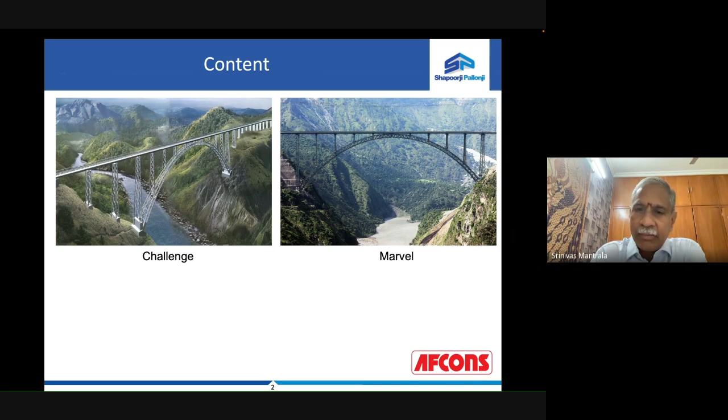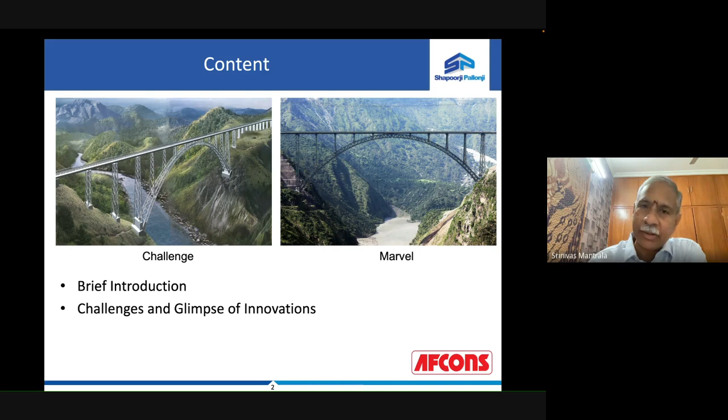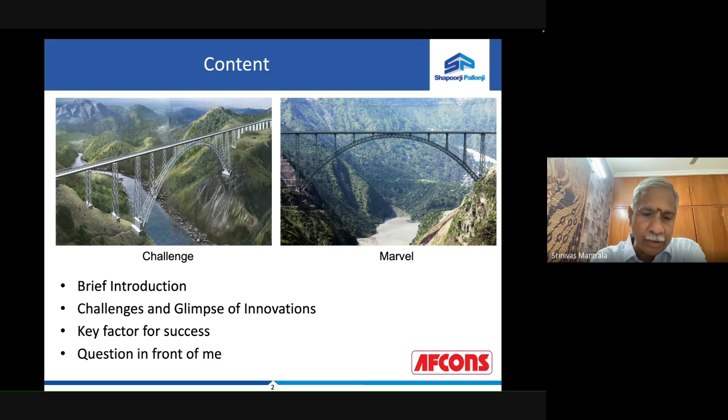It is a marvel. Now I'll be giving you a brief introduction about the bridge, then challenges and a glimpse of innovations in a very short time, because the work done is for more than 15 years and it can't be presented in just 20 or 25 minutes. And then what is the key factor for success that is required for future projects? And then at the end of the day, when I look back, there is a question in front of me, and I would like to answer that question.

Chenab Bridge is the world's highest railway bridge, and it is in the Udhampur, Srinagar, Baramulla rail link project. And it is in the Himalayas. Why Himalayas? They are young, active mountains. So the earthquakes are more and require very special design requirements. Temperatures go to sub-zero, so that requires special materials to be used for the construction of the bridge.

And it is very difficult to access, across a deep gorge with limited access. So our construction methodologies should take care of this limited accessibility. And it is a sensitive border area and also a politically disturbed area. So the whole bridge has to be planned properly. While the bridge is the physical structure, the backbone, the spirit behind the bridge is implementation of new technologies and innovations.

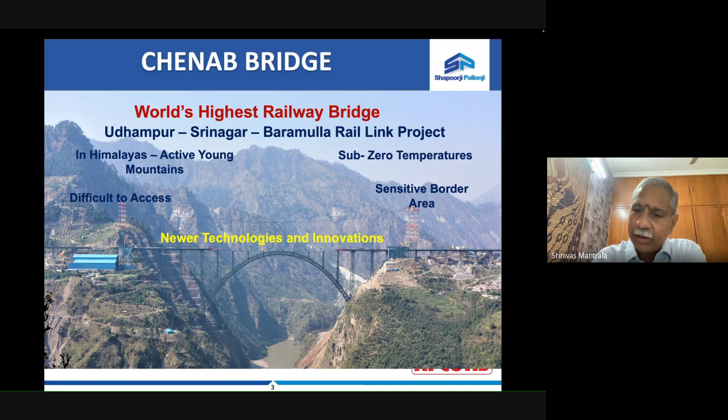Implementation of new technologies and innovations is not an easy thing. It is like you are trying to please your girlfriend with her favorite dish, which you don't know how to make. So what do you do? First, you understand the recipe, get the best materials, and then you conduct a couple of trials, succeed. Then when she comes, you serve it, and win her heart. This is what you have to do, and this is what has been done on Chenab Bridge.

So the brief introduction of the bridge: the client is Northern Railway, contractor is Afcons, an undertaking. Design consultants are from Finland and Germany. Proof consultants are from UK. Slope stabilization, which is the most complex part of the project, is done in India by IISc Bangalore and IIT Delhi. Most important, you can draw any plan, but execution, construction engineering, is the most difficult part. That was done by Afcons in-house.

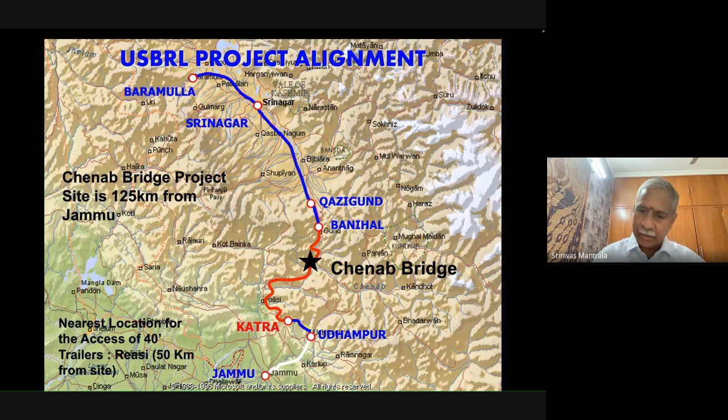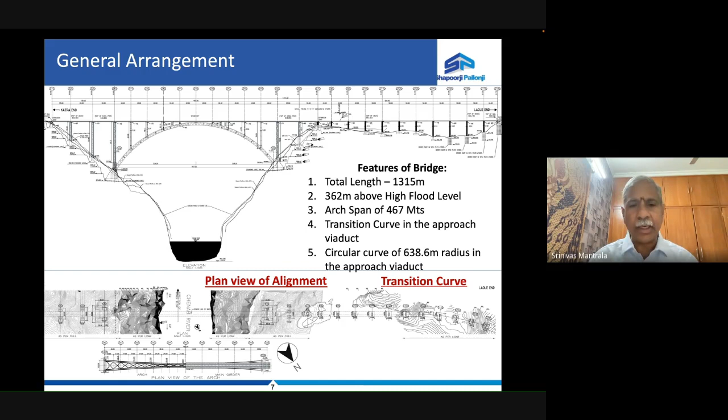Chenab Bridge is 125 kilometers from Jammu, and the nearest location for access of 40 feet trailers is Reasi, which is 50 kilometers away from the site. The general arrangement of the bridge looks like this. This is the plan, this is the elevation. In the plan, you can see there is a transition curve in the approaches. Length of the bridge is 1315 meters, and the height is 362 meters above high flood level.

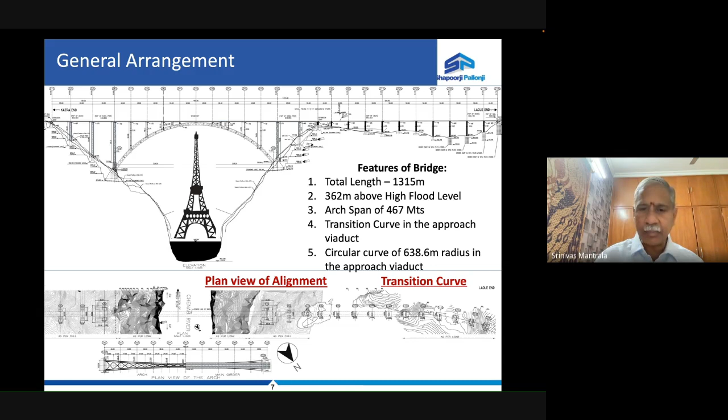So just for you to have a feel of the height, you can put the Eiffel Tower below the bridge and still have a clearance of 20 to 25 meters. Now, highlights of the Chenab Bridge, the world's highest railway bridge. Normally in India, bridges are designed with a life of 50 years or 100 years. We designed for 120 years. The deck is launched incrementally on a combined circular and transition curve for the first time in the world.

And we have installed the world's largest capacity crossbar cable crane for the erection of piers, trestles, and arch segments. We have done extensive wind tunnel testing because this bridge is across a gorge, and this has been done for the first time in India. And we have done fatigue design and detailing of the bridge. That is also for the first time in India, and it's a marvelous work.

And we have used double corrosion protected bar and cable anchors for ground support for the first time in India. And we have used the highest diameter and highest grade high strength friction grip bolts with geomet coating in this project. Normally bridges are never designed for blast loads. Because this bridge is close to the Pakistan border, we designed the bridge for blast loads.

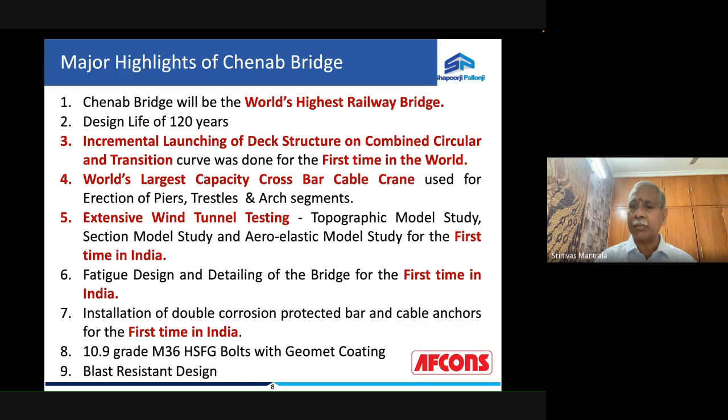And special considerations in the design: because it is in the Himalayas, we have used special structural steel because it is in sub-zero temperatures and a seismically active area. So we got a site-specific response spectrum developed, we carried out dynamic analysis of the structure, and we did the ductile detailing. Because of the poor geological conditions, we have done extensive investigations and extensive slope stability analysis. Because wind speeds are high, we have done wind tunnel tests and then designed the bridge according to that.

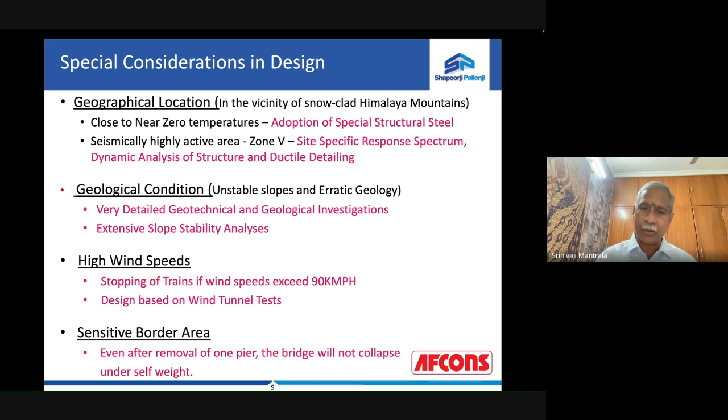Sensitive border area, the bridge is designed for redundancy. What is redundancy? This is the arch. Even if you remove one member, the arch will not collapse. And similarly, even if one diagonal member is removed, the bridge will not collapse. That is how the bridge shape and structural arrangement has been made to make sure that the entire thing works well. And even if these members are removed, still you can carry traffic on the bridge with a limited speed.

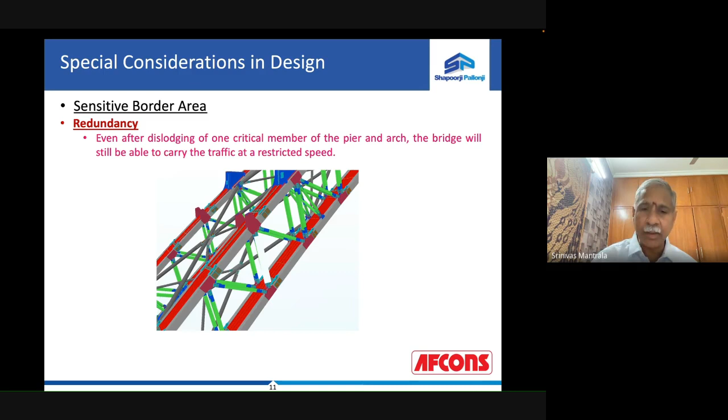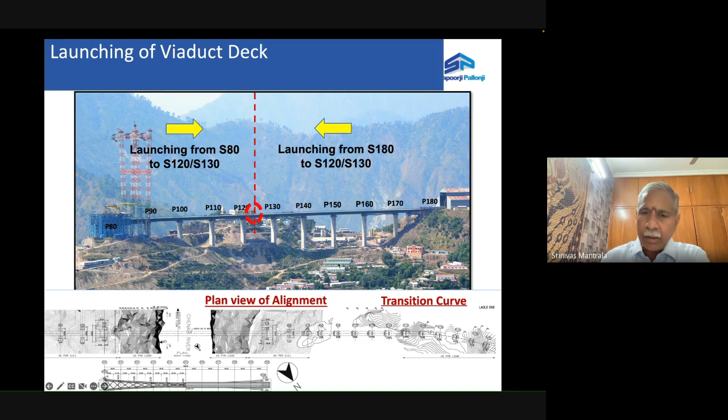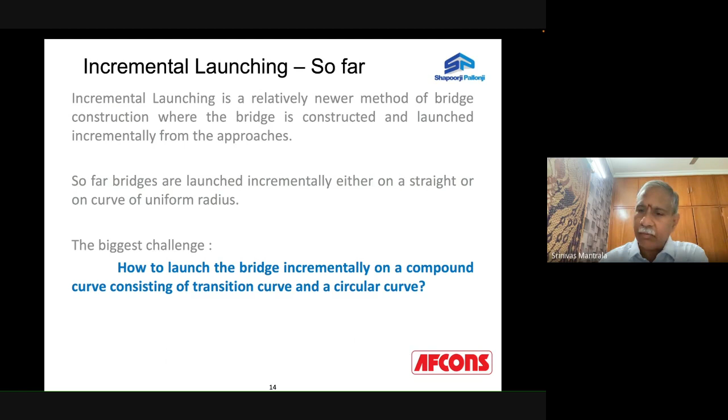Then what is incremental launching? So this is the bridge. I'm talking about this portion, and there is a transition curve here. This is the straight portion, and there is a transition curve. Then there is a circular curve. So world over, incremental launching is done either on a straight portion or on a curve of uniform radius. But in this project, we have used a very innovative technique and did the launching for the first time in the world on a combined circular and transition curve.

The principle is very simple. The deck is fabricated as per the bridge alignment. See, this is the circular curve, blue curve, and magenta. These two colors indicate the original bridge, and it has been fabricated like this only, but it is launched from this point to this point on a hypothetical launching circular curve of different radius. Then the question is how to decide this hypothetical launching curve.

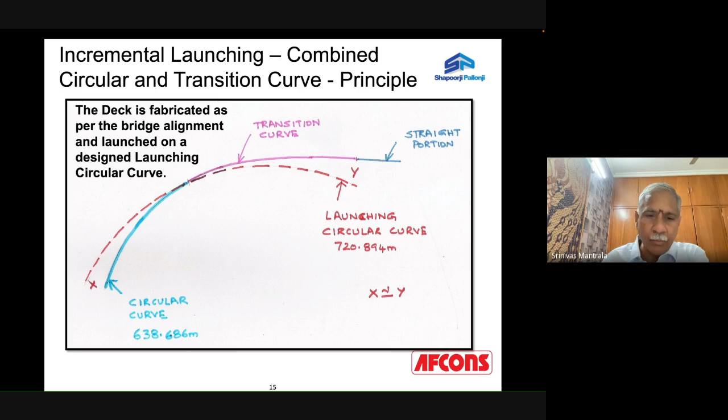So when you are trying to move, the deck tries to move laterally. So this distance x and this distance y should be more or less equal. So we followed this and we have done it. And the proof of the pudding is in its eating. So this is what the bridge looks like, combined circular and transition curve, which was incrementally launched.

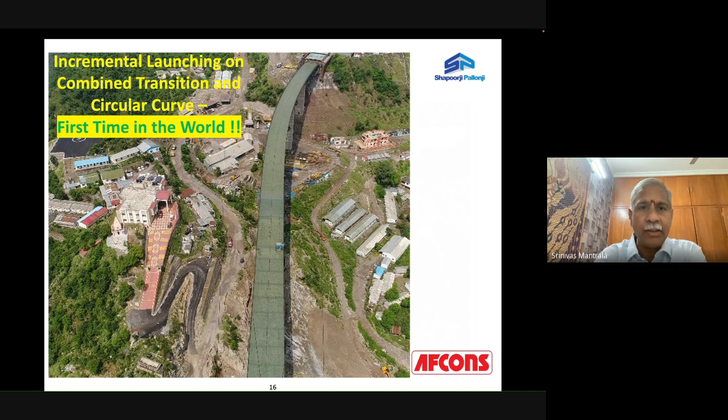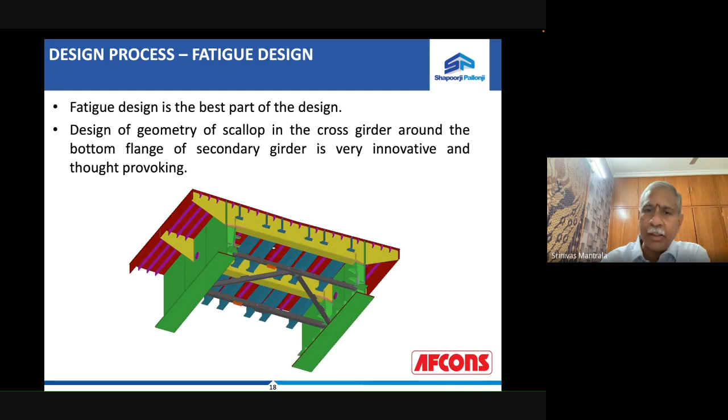Fatigue design, yes, is the best part of the design I like. And the design of the scallop around the secondary beam is very innovative. See, whenever there is an opening in a steel girder at the load carrying member, there will be stress concentration. That concentration will lead to fatigue cracks. There are two options: you go for a thicker plate or you work on the geometry of the opening.

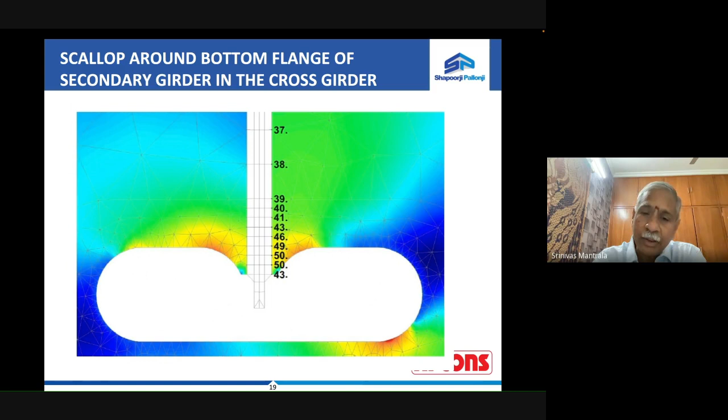By trial and error, we developed this very odd shape of the scallop, and thereby we have optimized the design. And for achieving this type of cutting of the scallops, we have used CNC controlled cutting machines, and this is how this has been done.

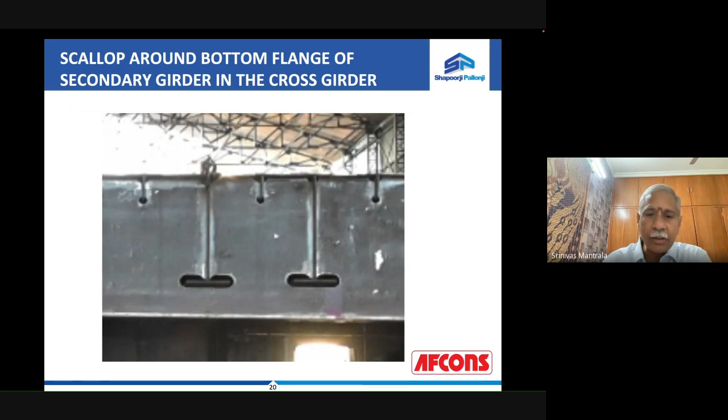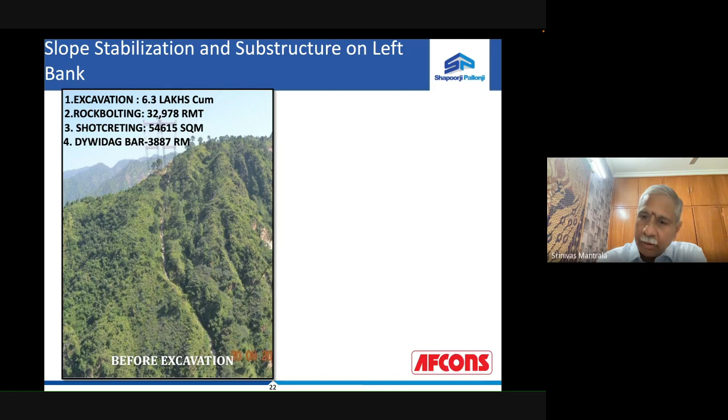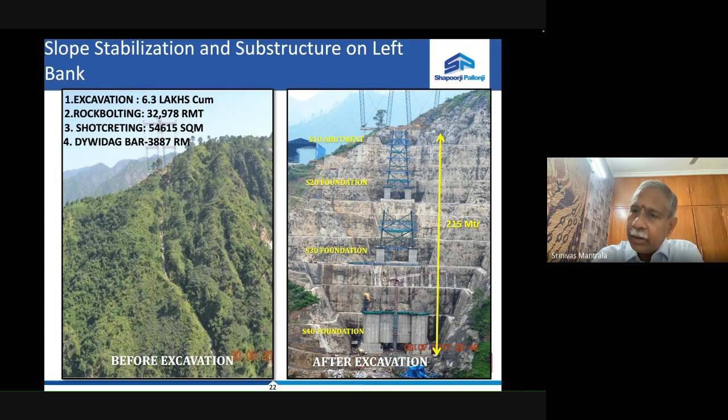So all this work has to be done ensuring safety. And the muck should not fall in the river. It's not that I excavate and dump everything in the river. No, that is not permitted. So the work has been completed very systematically. Design of slopes is one big job, and the execution of work is another job. This is the work we have done from first principles. And in fact, my PhD work is on design of slopes in highly jointed rock mass.

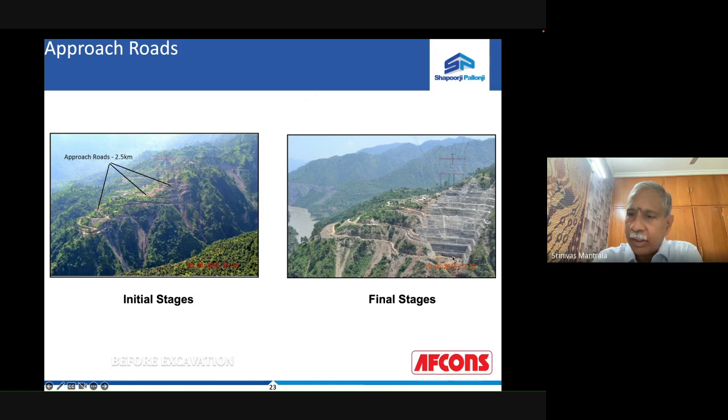So what we did, if you see, in the initial stages we developed the approach roads so that the muck, whatever is excavated, can be transported properly. And this is how it looks when we have completed, with approach roads and stabilized slopes.

Like I told, construction is also very important. We used the top-down method of construction. So we started from the highest point and started excavating as we moved forward. This green portion is the work completed and stabilized. The violet portion is the work in progress. So like this we have done.

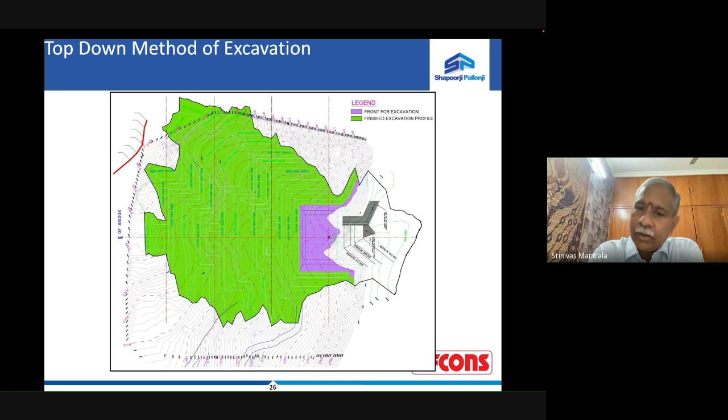And working as per contours, that concept is not just limited to civil engineering. Today, my son works in the area of artificial intelligence, and he talks about logistic regression, contours and contour gradients.

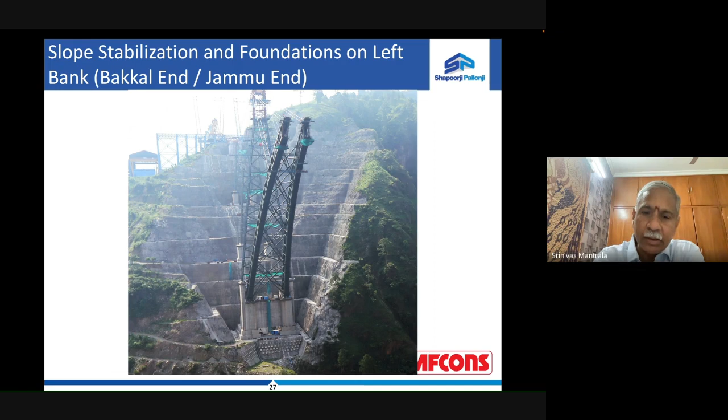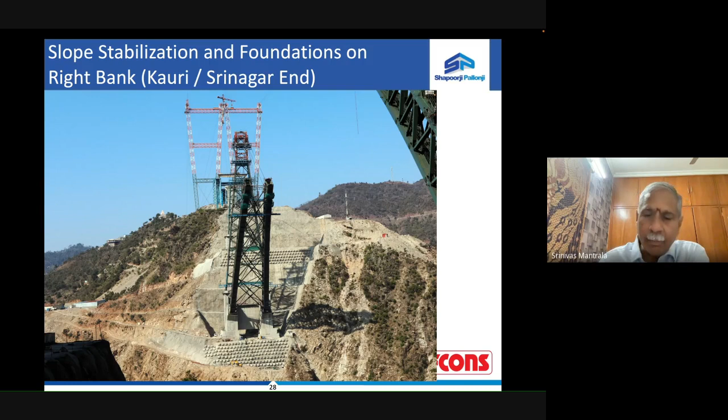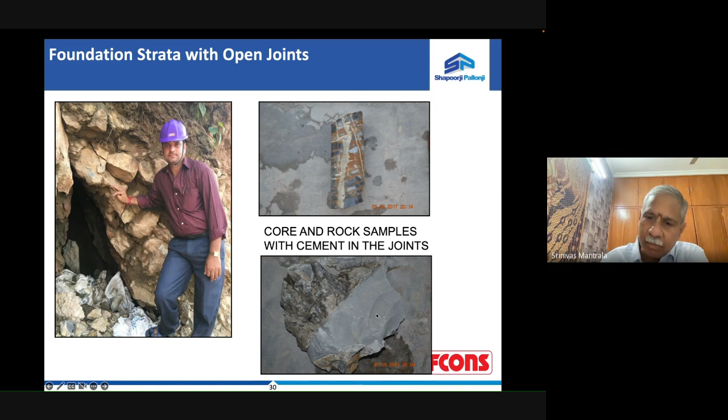So one proof is, you see when you take the core, you see the cement slurry. And if you see the excavated rock mass, this is all your cement. So this cement has filled up and improved the strength of the rock. While this is a pictorial representation, we also have done testing by multi-channel analysis of surface waves.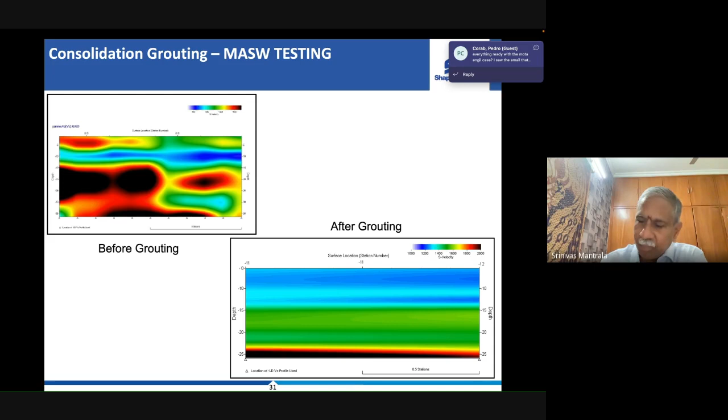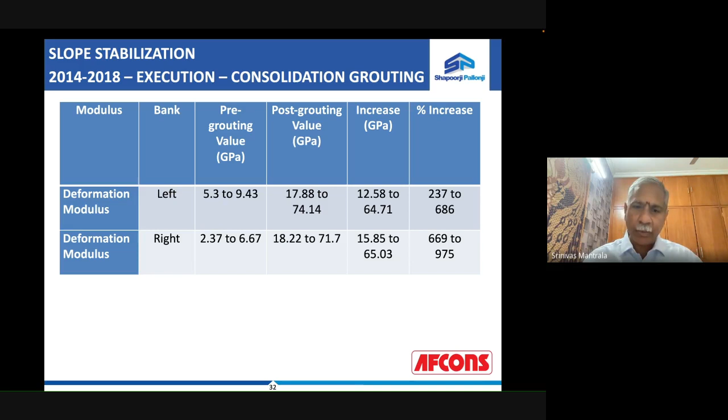If you see, this was the thing before we started the excavation, consolidation grouting. You see there are a lot of loose pockets. And after completion of the consolidation grouting, you see practically everything is in layers. That means very stable strata. And the elastic modulus has improved by almost 200 to 600% after consolidation grouting. So that means a very solid foundation has been provided for the arch as well as other foundations.

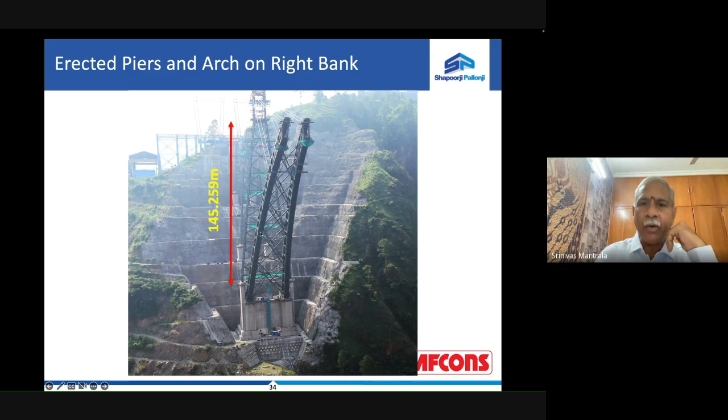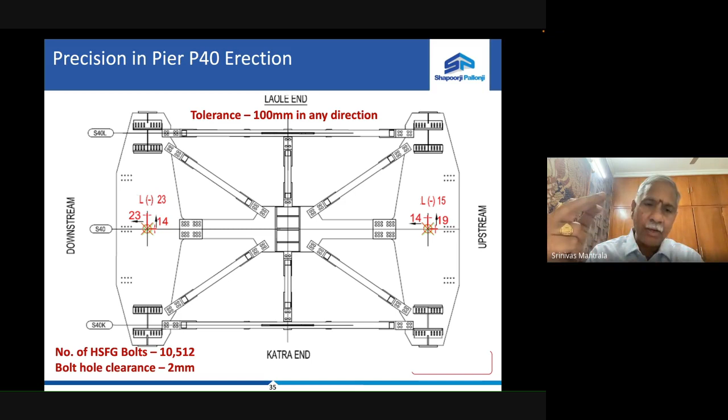Now, what is the delivery quality? So let us talk about pier erection. The height of the pier is 145 meters at S40. On the top of the pier, what is the tolerance? So the tolerance we achieved is 23 mm and 14 mm, whereas the permissible error in tolerance is 100 mm in any direction. So these figures speak for the quality of work. And it is not that we achieved it only at the top. Everything has to come in the fabrication of the equipment, fabrication of the components, assembly of the components, everything.

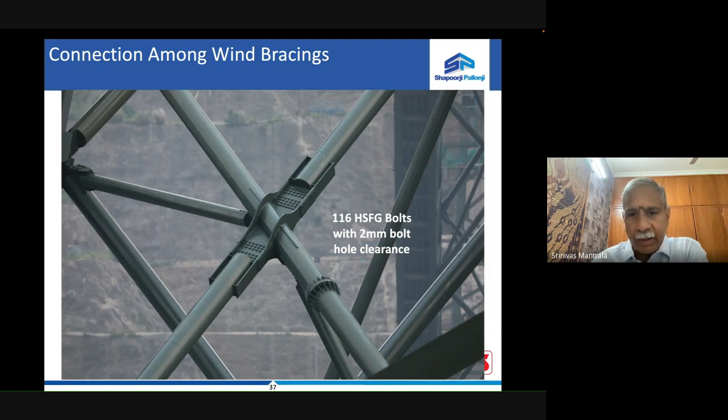And similarly, when you want to do arch erection before closure, these are some of the photographs of the joints of the arch in the sky. And all these bolts are perfectly matched. We did not drill or re-drill even a single bolt hole, or use a gasket. They met perfectly like a Lego toy.

And I would like to say one very important thing. What we did was, you pick up any bolt. There are something like 2 lakh bolts used in the arch and 3 lakh bolts used in the project. You pick up any bolt anywhere in the structure, we can trace it back to its manufacturer test certificates. That is, complete traceability of whatever work done has been established in the project.

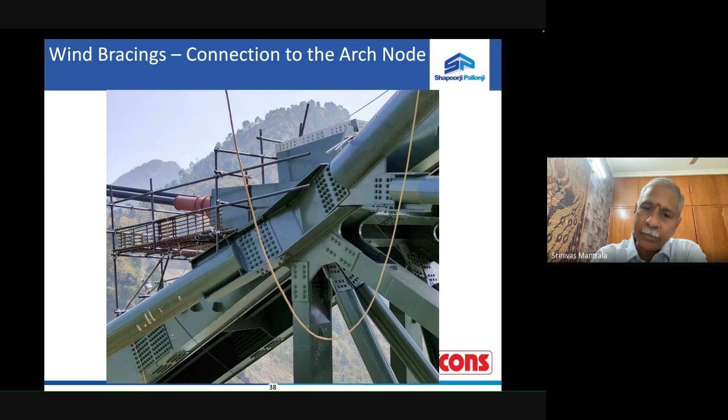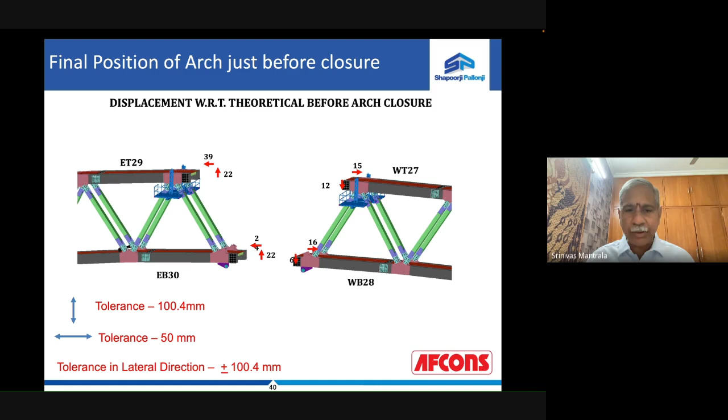So with this type of work, and the arch closure just before we wanted to close, the tolerances are 39 mm and 22 mm and 15 mm and 12 mm, whereas permitted tolerances are 100, 50 and 100 mm. And this did not happen overnight. See, the arch top is about 120 meters above the base of the arch and 250 meters away from the arch. With that, when we joined pieces one by one and came to this level, this is the precision we have achieved.

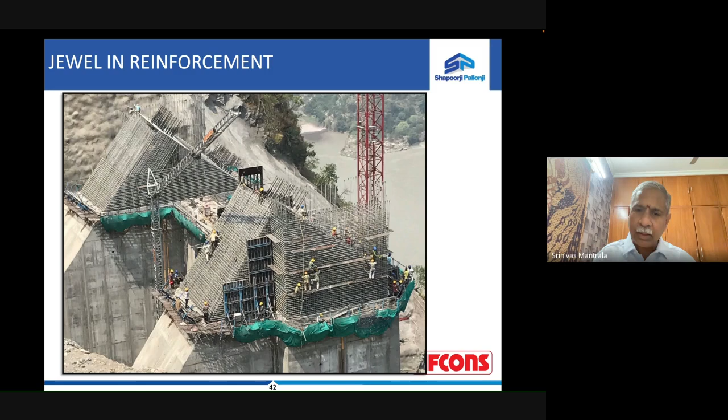And how was that achieved? So a lot of care has been taken at the base of the arch. This is the base of the arch, which receives here. And if you look at this, this is my most beautiful picture in this project. I call this jewel in reinforcement. Every reinforcement bar is of different length. This bar is of different length, this bar is of different length, this bar is different. So all bars are of different length. It is like you are making jewelry in reinforcement instead of gold. This has been done flawlessly.

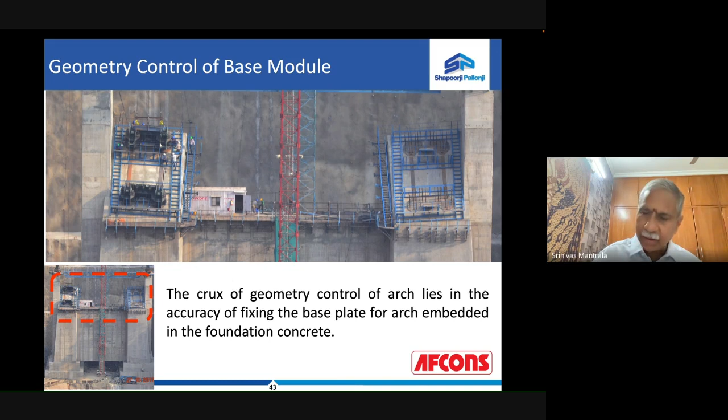And then after that we concreted, and now I have to seat this base module. If there is an error in the geometry of the base module, it will affect the tolerances at the top of the arch. There are no guidelines provided for us on what tolerances are to be achieved. We put a self-imposed tolerance of 5 millimeters, and we wanted to ensure it at 12 points on the base in XYZ. There are 4 bases, of which three are all within 5 millimeters, and only one we could not achieve 5 mm accuracy.

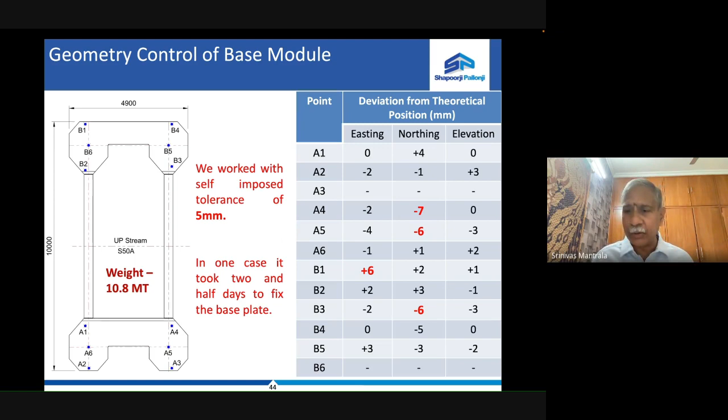And after struggling for 2.5 days, we thought, okay, enough is enough. We'll handle it whenever the problem comes. But at the end of 2.5 days, we are talking about a figure of -7 and -6 against -5 values. And this all led to such a beautiful work.

Now, most important thing in erection of the arch is how do you lift the components? You look at this component, it is coming almost parallel to the surface where it has to come. So there is an element, not a very simple element of engineering, on how to lift the components so they come at the required angle. So all that has been done.

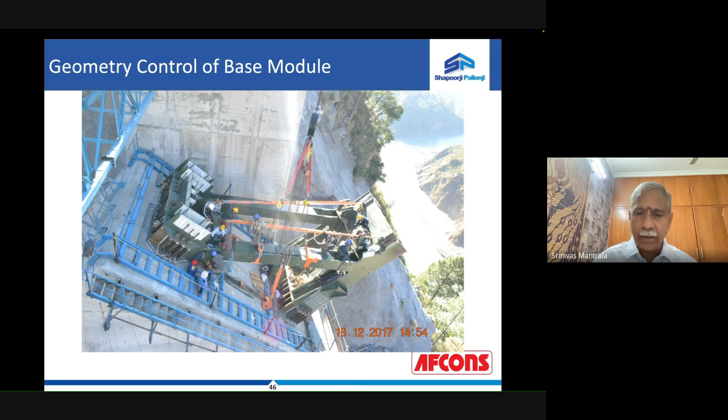So arch base has been installed, and then the gaps have been closed using multi-metal compound, and then arch has been erected. For the erection of the arch, we have installed world's largest crossbar cable crane, which has a capacity of 34 metric tons on single hook, and individual capacity of each bar is 20 tons.

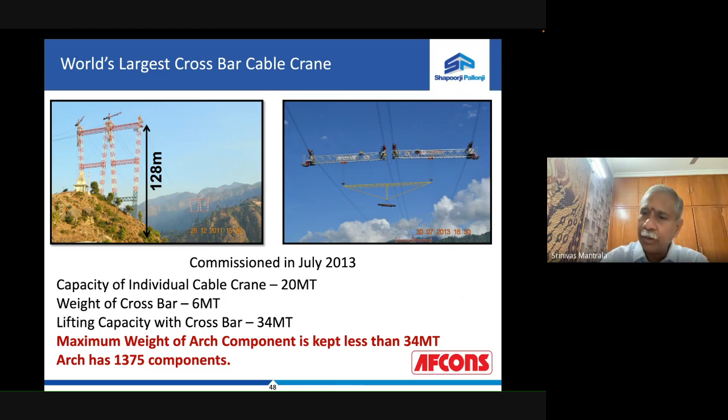And for the arch erection, since the capacity is limited to 34, each component of the arch members should be less than 34 tons. And there are 1,375 components to be erected. And this cable crane is something like 128 meters. Now, how do we erect this cable crane?

So we have gone for a very simple thing. There is a movie called Cliffhanger, where Sylvester Stallone tries to climb the cliffs. What he does, he drives a nail or peg one level above, holds that, climbs up, and then installs another nail or peg and moves up. Same thing has been done in this project also.

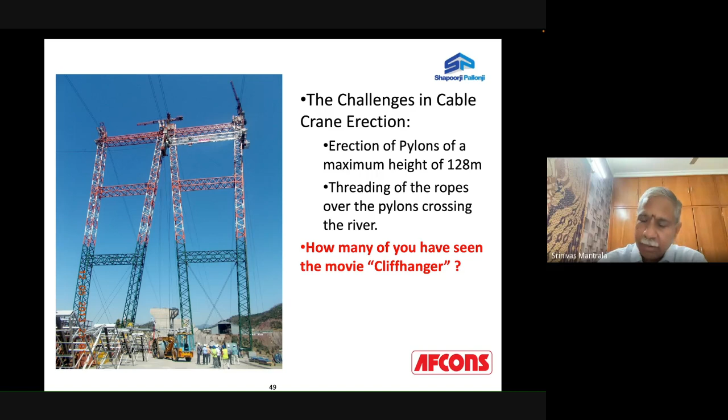So the first part of the cable crane has been installed with the help of a tower crane, which is around 50 meters. Then we have installed two what is called climbing cranes. These climbing cranes will erect one module and hold it, then move up, then install the other module. And these climbing cranes have been designed indigenously.

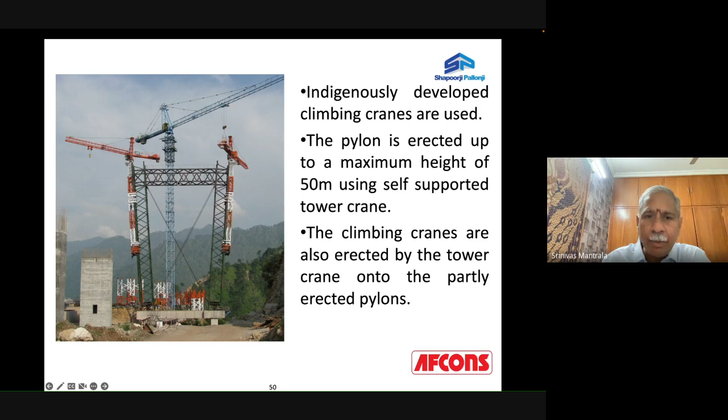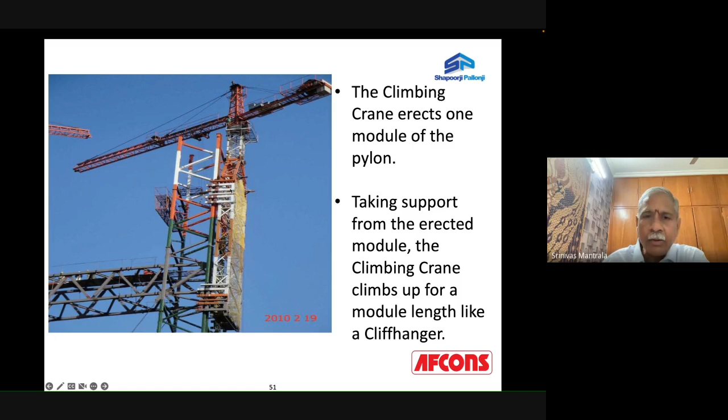Now you see in this figure, the climbing crane is at the level of horizontal member. The next figure, you see one module has been erected and the climbing crane has moved up. So like this it has been completed. This is how one pylon of one side has been completed. Likewise, all four pylons have been completed.

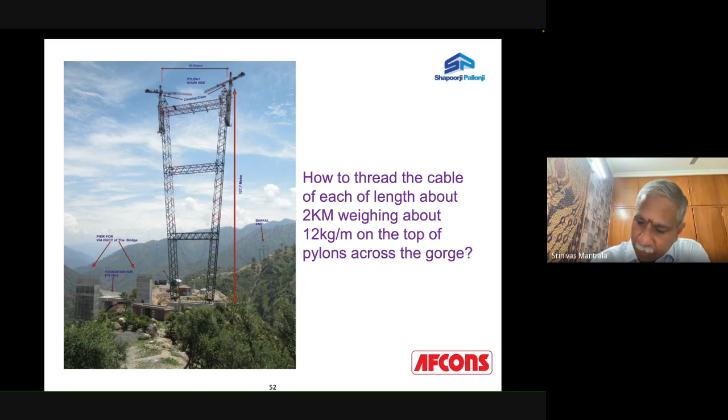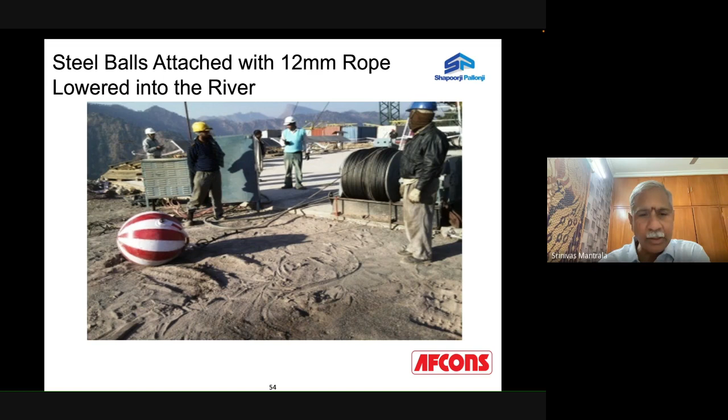Now, after all the four pylons have been completed, the question is, how do you put cables on the top of it? If you ask today our young engineers, they will say we'll use helicopter and do it. But we have done something different. We did not use helicopters. We used simple balls. These are all fabricated steel balls, and these are connected to winches on either side of the river. Then we drop it from both sides and then send a person on a boat. He joins both the ropes and brings back the balls.

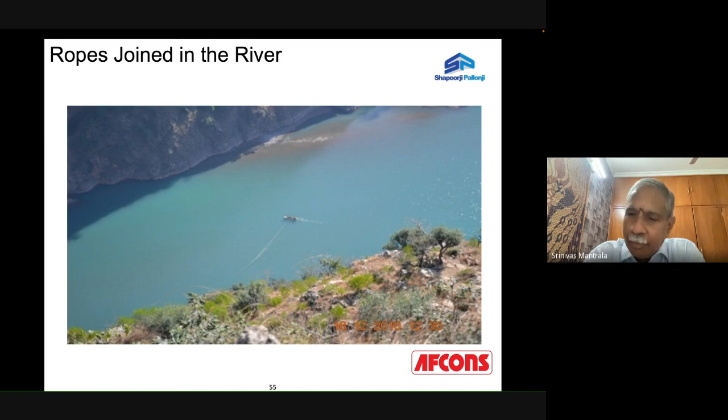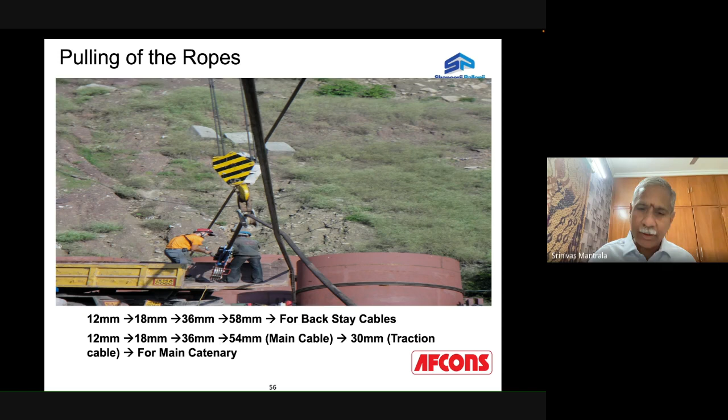Now what happens, there is a continuous rope available from one bank to the other bank. So we started with a 12 rope, then 18 rope, then 36 rope connected, and finally pulled all the cables. Then once the entire 58 cables are from one side to the other side, we just simply used the climbing crane and installed the cables. That's all. This is all the simple innovative work that has been done. And innovation is very simple. Yeah, for the first time it is difficult. And once it is done, anybody can do it.

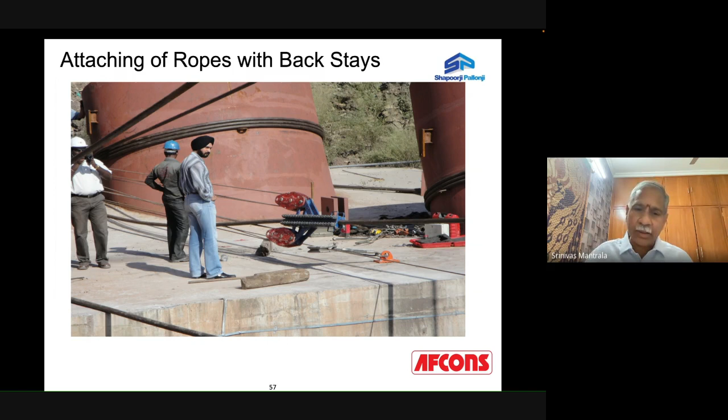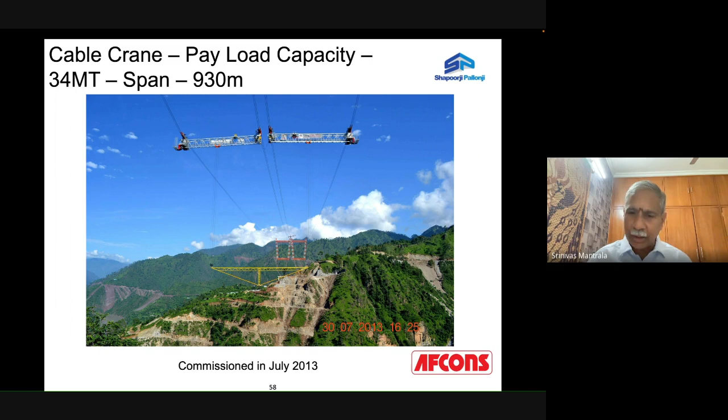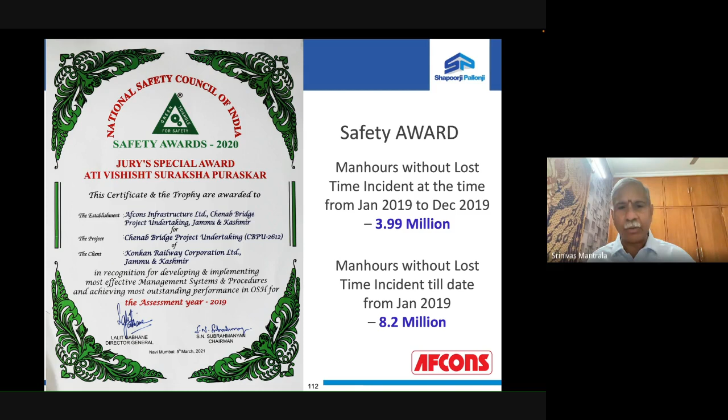So this is the cable crane commissioned in the month of July 2013. And this has been used extensively for the erection of the arch and piers. And in all this work, there's not even a single untoward incident. Normally, Safety Council of India gives Vishisht Suraksha Puraskar, but they thought Chenab deserves even something bigger than Vishisht. So they have given Ati Vishisht Suraksha Puraskar for Chenab Bridge in the year 2019. That is how we transformed a challenge into a marvel.

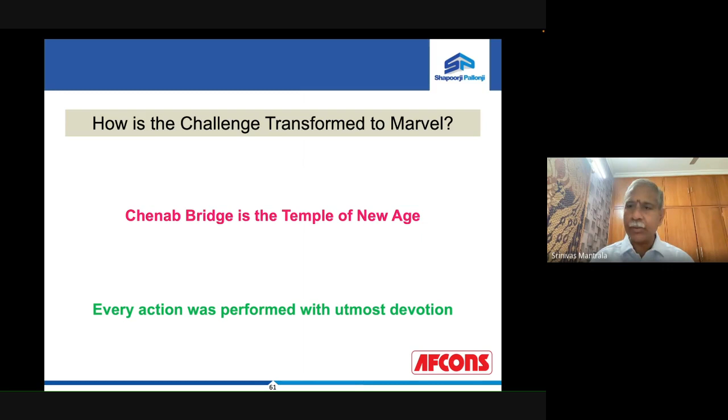Now, the question, how is the challenge transformed to marvel? What is the key factor for success? The answer is everybody looked at Chenab Bridge as a temple of new age. So when you go to temple, whatever you do is with utmost devotion. So on Chenab Bridge, every action was performed with utmost devotion.

And now, at the end, there is a question in front of me. Many people ask me. The question is, what was your expertise to work on this project and going forward? Are you a permanent work designer? Do you do temporary work designs? Do you do construction engineering, contract management, project management? So this is a question everybody will ask me.

But my answer is simple. My expertise is work from first principles. If you are working in an uncharted area and on new emerging technologies and new areas of work, you should have strong grounding on the first principles, and you should work from known to the unknown. Even that is what is enshrined in our Vedic textbooks also.

Now, I got this grounding on working from first principles during my training in IRSE, Indian Railway Service of Engineers. And whatever new things we wanted to do, AFCONS generally allowed me to try whatever is required, and we have done. And now the work speaks for what has been done.